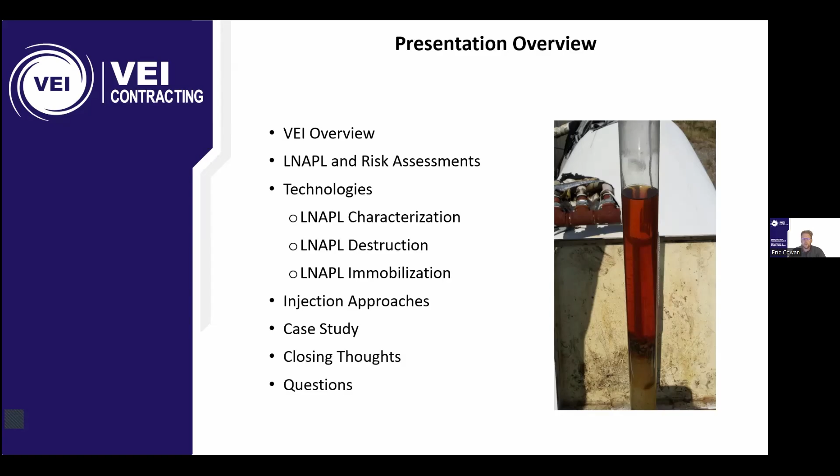I won't go through the Vertex thing, but for myself, I am a senior project manager with VEI. I've been here for over 10 years, and I work specifically in the remediation division with Kevin, primarily focused on injection techniques for in situ remediation. So let's jump into it.

So what are some of the details with LNAPL and risk assessments across provinces? I'll go into some - they're pretty similar, but there are some nuances between key provinces. With Alberta, they specify active remediation or removal to the extent practicable for mobile LNAPL, and for non-mobile, it's more about control - they want to see that it's stable or decreasing for source control. This is pretty common across all jurisdictions, but they likely want to see some sort of risk management with exposure control, so vapor or what have you.

With British Columbia, it's a little more detailed - they specify a monitoring program for one year to determine that it's stable or not mobile. They actually have a classification of high risk site for properties with LNAPL over 2 millimeters, so sheen or higher, basically. And that can have some issues with the classification of the property.

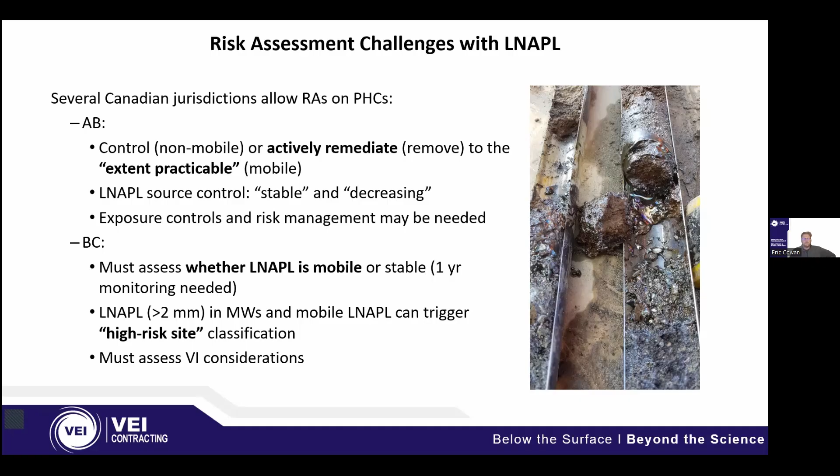So what do we have here in Ontario, where VEI is centralized? We have a similar process, but there is some permission for LNAPL in bedrock, though it's not preferred. In overburden, it's very rare that they would allow an RA with overburden LNAPL impacts, probably impossible. They have this term, remove LNAPL to the extent practicable, including films, sheen, and 50% solubility. I want to highlight that term, extent practicable, because it's in the title, but it doesn't mean cost. It's more about the technological availability to do this. It's not an excuse to say it's too costly.

Rather, you need an excuse of, well, it's just impossible technologically to do this. To the point of 50% solubility, this is something interesting in Ontario: you don't actually need to detect LNAPL, but if your groundwater concentrations are above 50% solubility, that could highlight the potential for product to be generated. That could be flagged under the RA assessment. And again, like the other jurisdictions, the vapor intrusion considerations must be addressed or assessed.

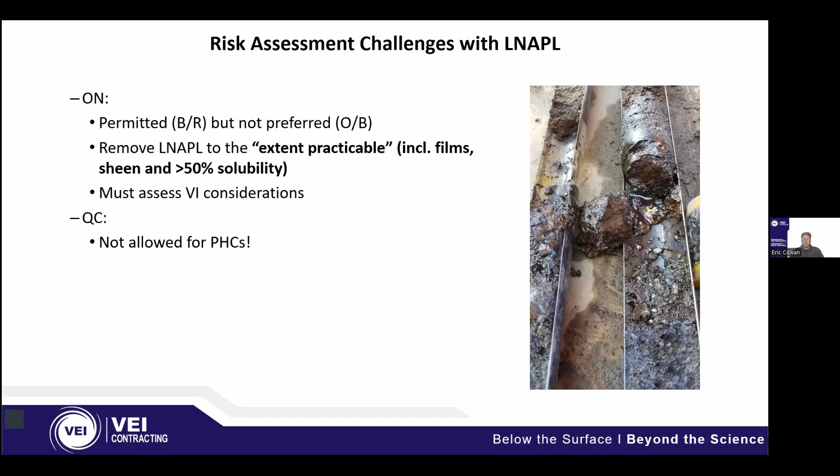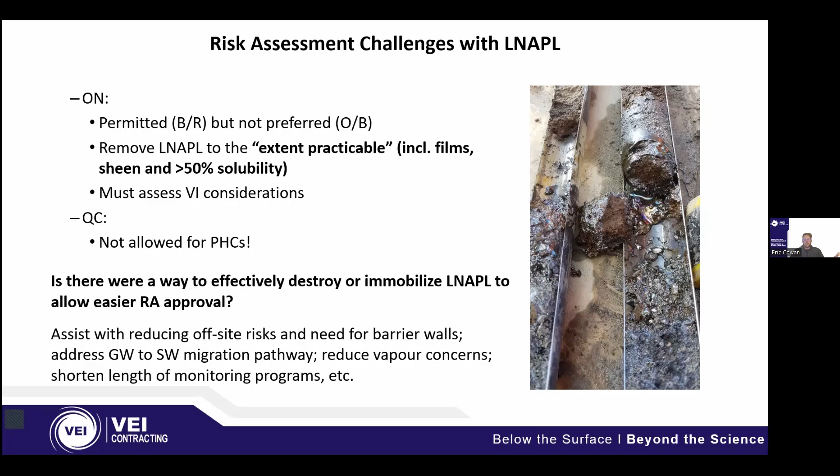But what about Quebec? RAs actually aren't allowed for PHCs in general, so it's kind of a no-go there from the get-go. So the whole point of this talk, the objectives, is to look into a way to effectively destroy or immobilize LNAPL for an easier RA approval. We want to assist with reducing offsite risk and the need for barrier walls, addressing groundwater to surface water migration pathways with these techniques. We're reducing the vapor concerns that may come with it, and we can shorten the length of monitoring programs when doing this.

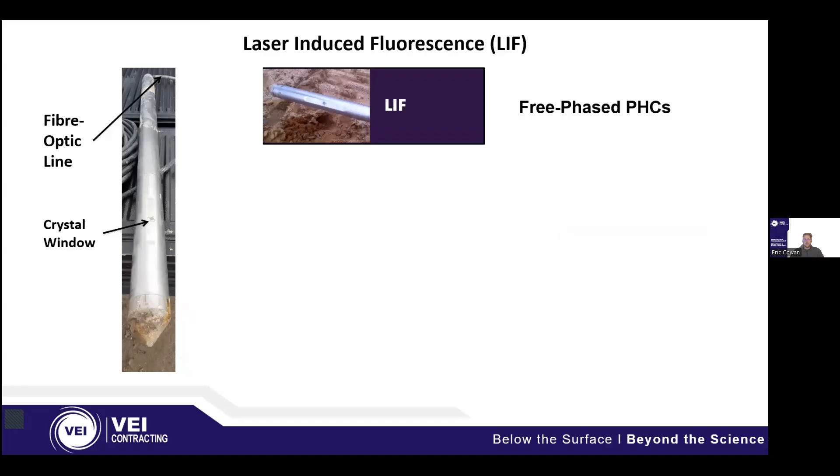So we can jump right into some of the technologies that can assist with this. Like I mentioned at the top, the conceptual site model, really understanding your LNAPL plume, is the first step. Something that can help with this is a technology called laser-induced fluorescence. This is a tool specifically used to detect free-phase PHCs in situ with a direct push tool that uses UV light to excite the polyaromatic hydrocarbons, PAHs, within the free-phase PHCs.

That creates a fluorescent effect. Within this probe, which you can see on the left here, we collect that fluorescence response, and we can detect in real time the free-phase PHCs, and fingerprint what type they are as we advance this direct push tooling. I'll get into more detail in a second of what that looks like in a report. The idea here is we can add on to an existing standard environmental investigation with boreholes and monitoring wells, an additional semi-quantitative response to say, hey, we're actually seeing these plumes in real time and where they are, and characterize it in a much faster way.

So you can do 10 to 12 points a day and get data in real time. We also add an EC electrical conductivity sensor on this as well, and we can classify the soil types as we do it. So what does this look like?

Here's an example of what crude oil and diesel just look like with the naked eye. You can see crude oil quite easily with just regular light. Diesel is invisible. So when you flash UV light on these jars in this example, you can see the crude oil has a fluorescent effect, but the diesel, you can actually show that it's quite hidden without this UV light. You can maybe see a little bit with your naked eye, but above that, there are globules of diesel that were hidden unless you expose it to the UV light. Those aromatic molecules, the PAHs, absorb that UV light and then fluoresce a response that we collect with the LIF.

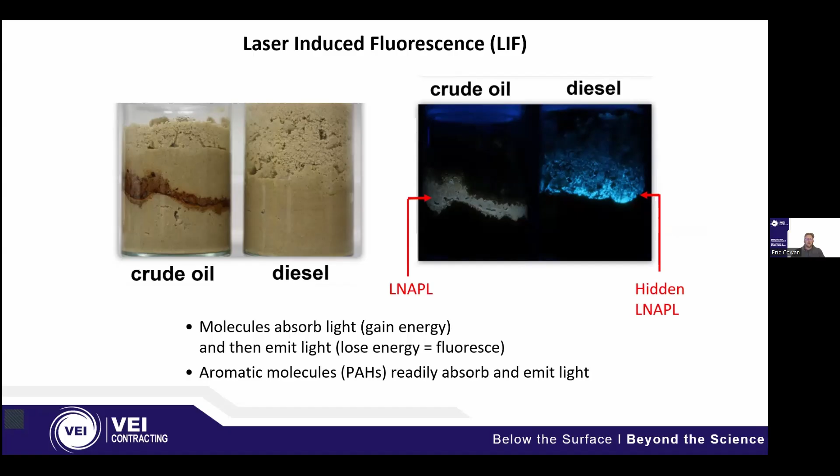So what does this look like in a log? This is what the field technician will be seeing on their laptop in the field as they're advancing the probe. We have two examples here of different fingerprints of fuels that were found in the ground.

On the left is an example of a diesel spill that was identified with LIF. You can see the green coloration in the response, which is along the x-axis, while depth is on the y-axis as you're advancing down.

Each of these callouts is called a fingerprint. We have different terms for lighter or heavier fuels: they're either blue shifted, meaning more of a lighter PHC like naphthalene, or red shifted, which is something heavier like diesel or heating fuel or crude oil.

This creates these fingerprint callouts, and we can identify and speciate the type of PHC in the ground. Diesel has a green coloration of the response, that's the average of these wavelength peaks, a bit more red shifted, whereas something like kerosene jet fuel is very much blue shifted, with lighter PHCs, smaller PHCs being dominant. So it's a great tool to identify the actual type of PHC, not just where they are.

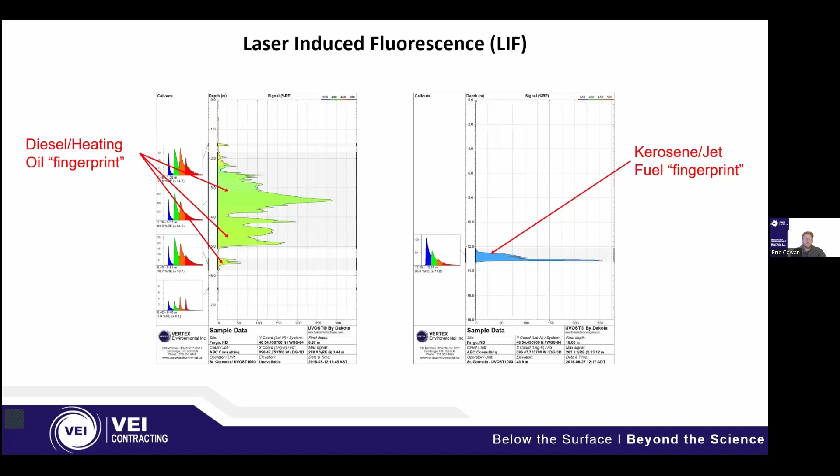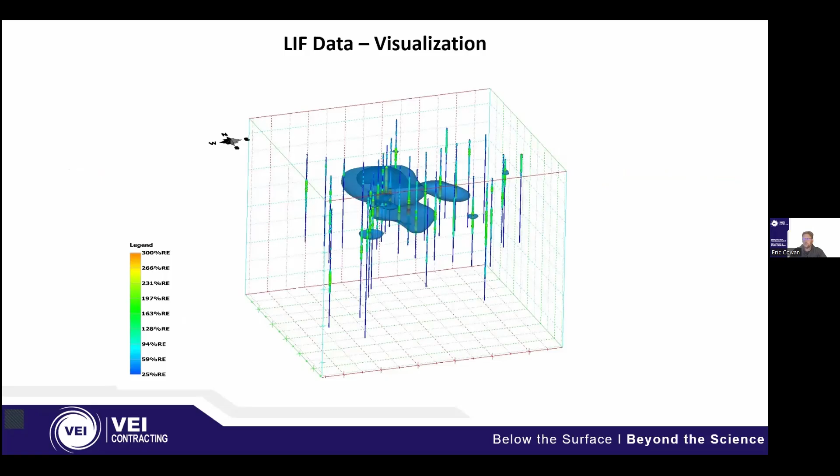But we can move on to destruction techniques. So what happens after we've done these characterization tools and have a good understanding of the plume structure, we want to now address it with treatment. The first technology I'll jump into is Trap and Treat BOS 200 Plus.

This is a combination of activated carbon, which is the trap portion of the amendment, with different terminal electron acceptors and nutrients and microbes as the treatment portion of the carbon trap and treat.

What this means is that activated carbon, like you'd find in a Brita filter or that used in water treatment systems, is very porous and can trap or absorb PHCs within the micro, macro, and mesopores, small to large pores within the structure of the carbon.

When we include terminal electron acceptors and different microbes, which exist naturally in the subsurface as well, but we add them along with BOS 200, you actually create biofilms and degradation sites within the pore structure of the carbon. This is very powerful because you can remove PHC mass from the subsurface and from the dissolved phase.

We'll talk about LNAPL as well, but you're actually destroying it within the carbon structure and freeing up more space for additional trapping once the eventual destruction of the PHCs happens within the pore space. It has a regenerative effect: you're trapping and treating, degrading, and then once that's gone, the end products are kicked out, opening up more pore space for additional treatment.

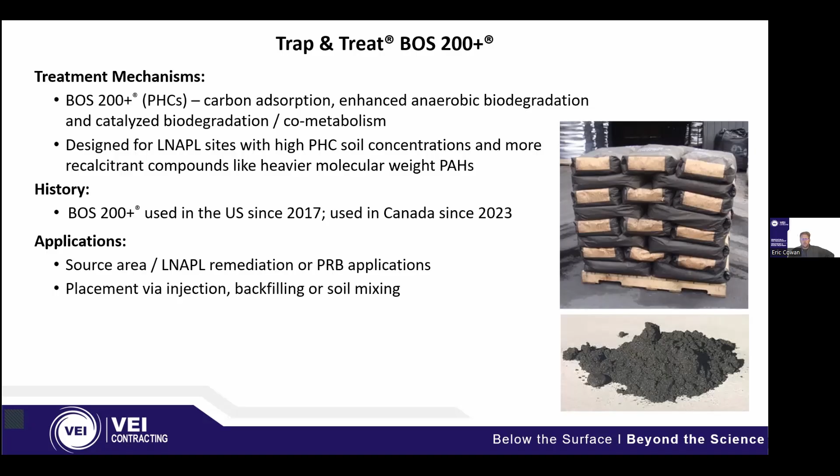The key thing here I want to highlight is it overcomes the contaminant mass limitations of PHCs in soil, so you can address some of these heavier soil mass sites or LNAPL sites. In doing so, because we're adding this carbon amendment that's very persistent, it actually prevents back diffusion and rebound, because that amendment exists within the pore structure and works for years and years. With that regeneration effect, you're able to keep that system going with trap and treat, and usually it's a single application, and again, it's a long-term solution.

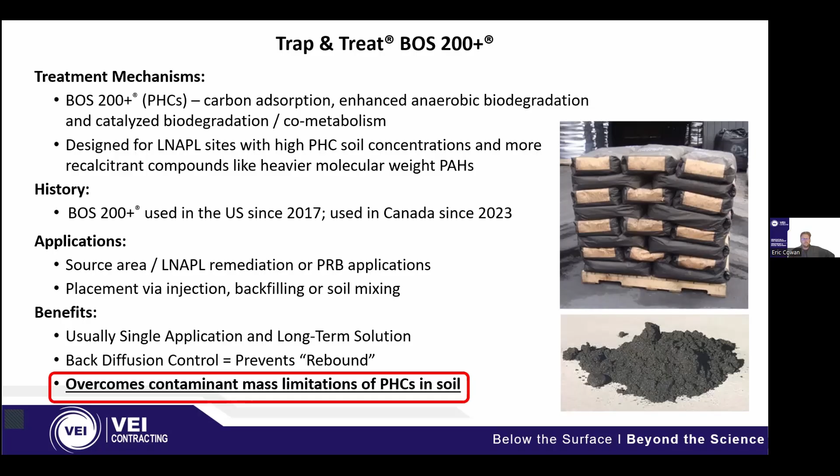So this is a very cool figure image from the suppliers of trap and treat. It's an image of biofilm generation - in the bubbles, you can see this microbial activity occurring on the actual carbon pore structure.

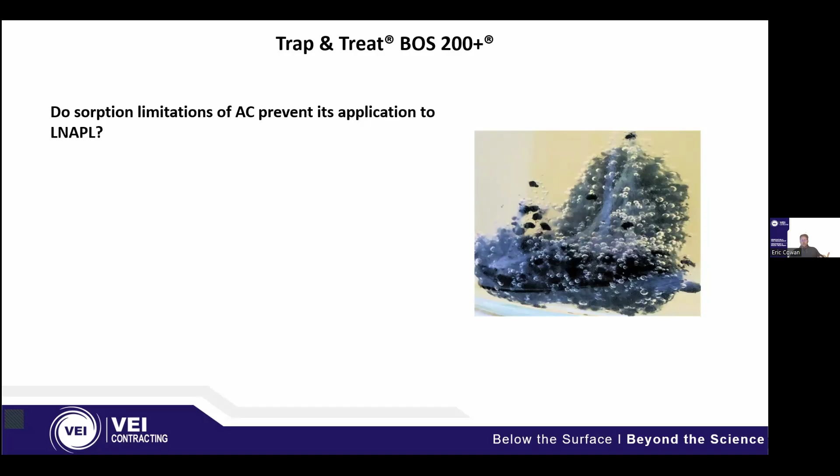So what are the actual absorption limitations of standard activated carbon, like you would have on a water treatment system? Studies have shown it's usually around 20 to 25% by weight. This means the saturation absorption capacity of PHCs is such that if you had 1 kilogram of PHCs, you'd need 5 times that amount of carbon to effectively absorb that mass. But with BOS 200 plus, before we even get into the destruction technology, the carbon they use within trap and treat has actually been measured much higher - it's at almost 60% by weight. So you get more than double the absorption capacity of PHCs compared to standard granular activated carbon.

One of the key things we like to specify here, and RPI likes to show in some other studies I won't get into, is that the actual adsorbed PHCs that enter the pore space of the carbon can get down to the micropore level - very small spaces - and they're still bioavailable there. There isn't an issue of it only treating in the large pore spaces and not everything; they can show it is bioavailable and can be treated even down to the micropore level. Basically, the bugs can fit in there and it does work.

When we get back to that regeneration topic, studies show it actually recovers a substantial amount of that absorption capacity. So your carbon traps PHCs, treats them, removes the end products, and then can recover over 90% of that original absorption capacity following that first round of treatment. That's very, very powerful.

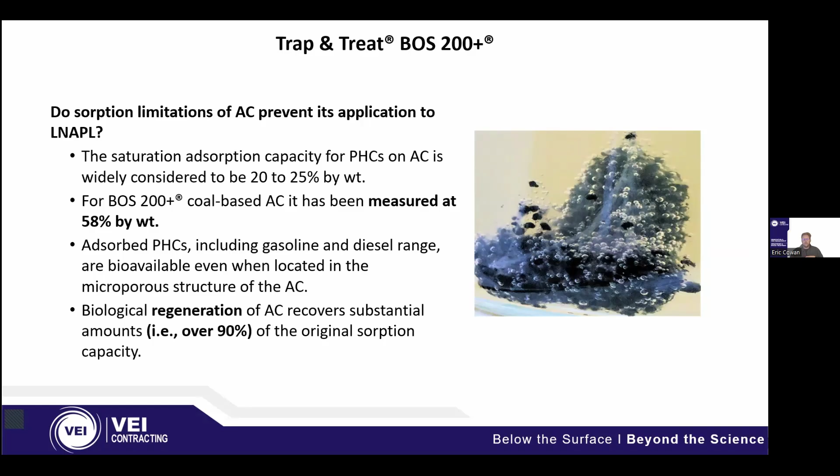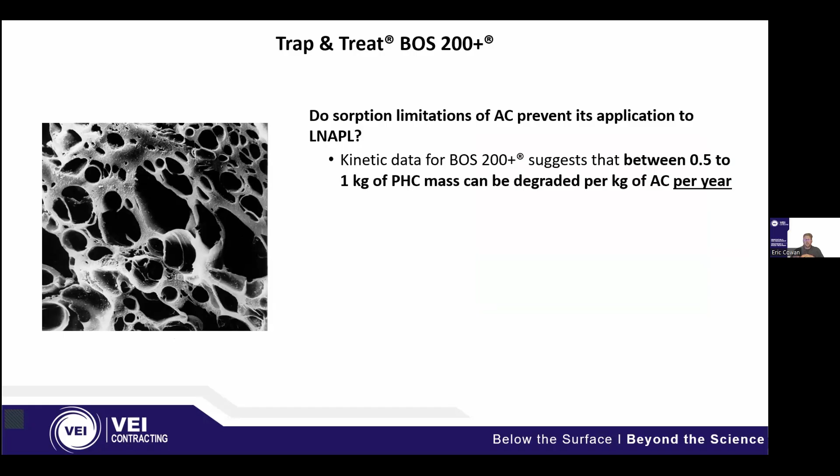So what about LNAPL? Is there a limitation with activated carbon when we have sites with high soil mass and LNAPL levels? This gets into some of the kinetic data we can discuss, where we can actually show that BOS 200 plus, with some of the things I just mentioned, can degrade up to 1 kilogram of PHC mass for every kilogram of AC per year. This is really powerful in the sense that we don't need that 5x of standard carbon - the 5 kilograms of carbon to 1 kilogram of PHCs in standard carbon - but you can have a much lesser mass of BOS 200 plus to address basically that 1-to-1 PHCs to activated carbon ratio.

And that regeneration effect, again, even when it's saturated with LNAPL, is a viable process - that regeneration can occur and you can free up more space. Overall, it's a coal-based activated carbon amendment, and it has the necessary properties, like I just mentioned, with that degradation mechanism to address, realistically, these LNAPL impacted sites.

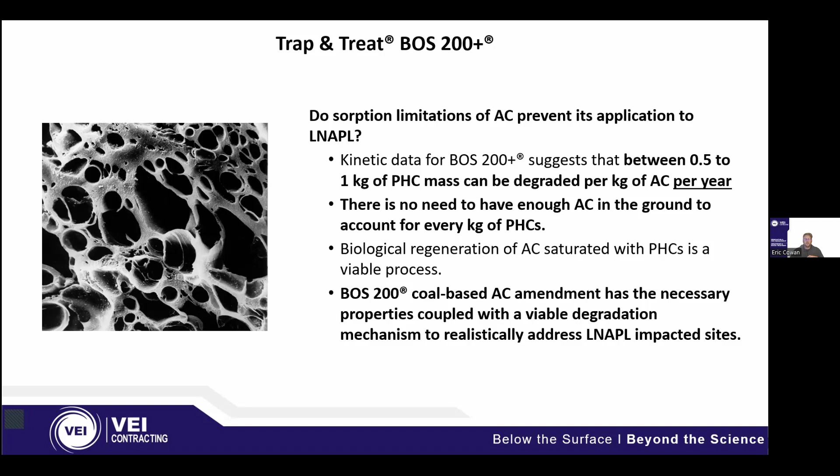Moving on to another technology - in the case study I'll go into at the end, it's about trap and treat, but I wanted to mention immobilization first. This is specific to sites where there is LNAPL that's mobile and causing an issue, potentially to nearby receptors. Perhaps the objective isn't necessarily to treat and destroy everything, but you really just want to immobilize the LNAPL so it's not a migration risk or mobile risk.

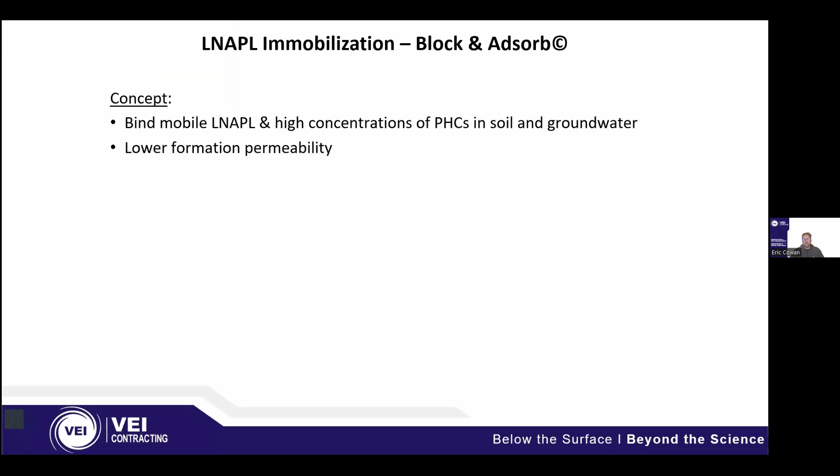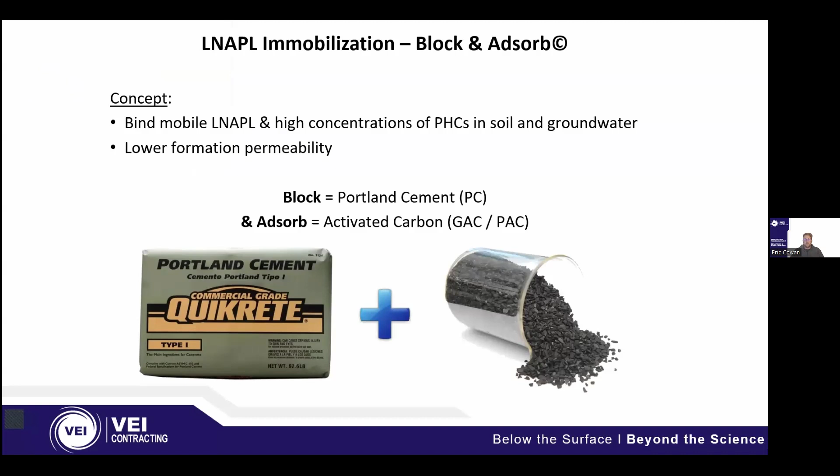The concept here for this technology is called block and adsorb. It's essentially to bind that mobile LNAPL and high concentrations of PHCs in soil and groundwater and lower the formation permeability in general to block that PHC mass and LNAPL from migrating. It's quite simple actually - it's just a mixture of Portland cement and activated carbon. These are readily available and inexpensive materials that can be quite powerful when combined.

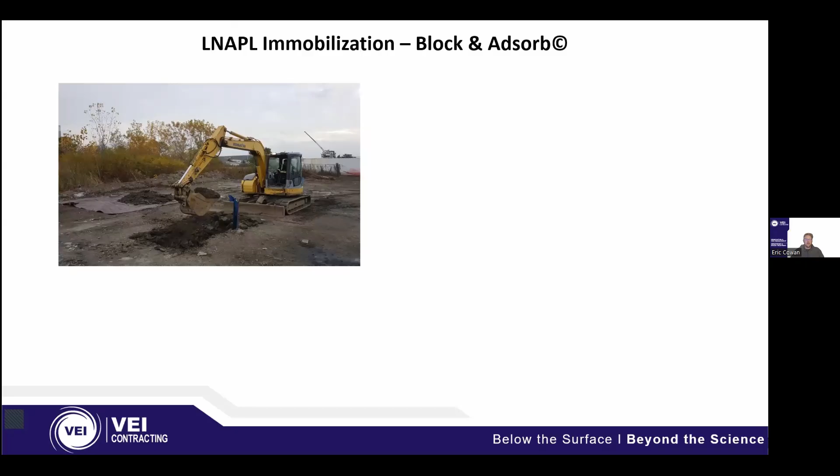We had a pilot recently where there were pretty high levels of LNAPL in shallow groundwater, and I can show you some pictures here - we're doing a test pit.

And you can see here this bucket's basically full of pure product, just hovering above the water table. So the goal of this pilot was to show immobilizing this product with block and adsorb.

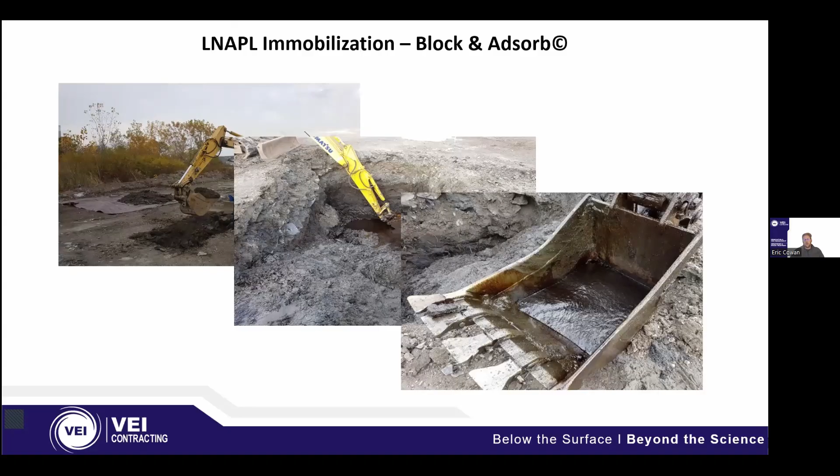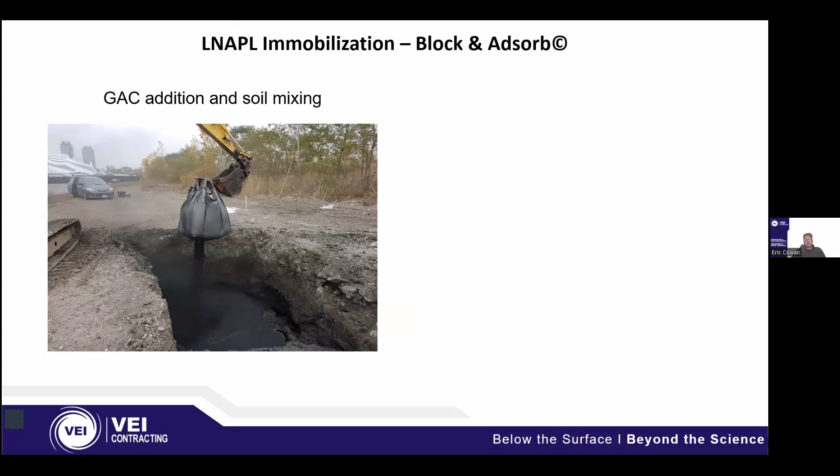So what we did is we opened up a pilot test pit. It was about a 10 by 10 area. We added granular activated carbon and mixed it up. We then subsequently added Portland cement and did another round of soil mixing, and let that cure for a few days. And here are the results.

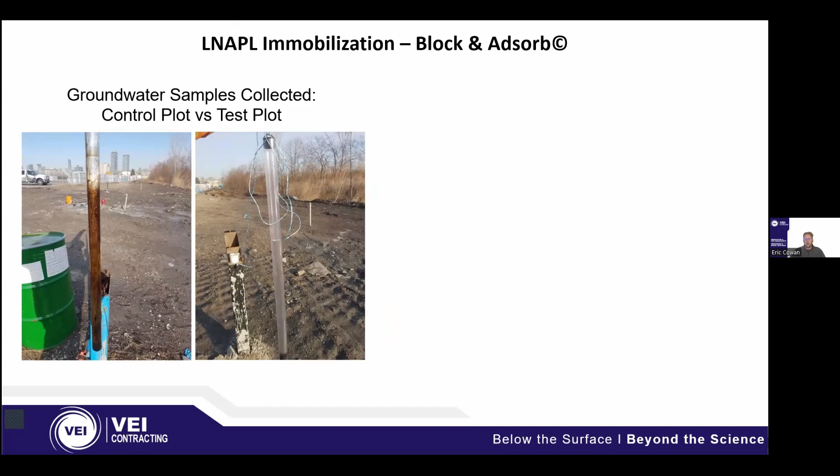So you can see on the left here is a bailer collecting a sample from the test well pre-soil mixing, and it's heavily stained. There's measurable thickness of product. And then here's the test well in the same location, post soil mixing, coming up with zero visible product, if not looking extremely clean. So what does that look like actually in the ground?

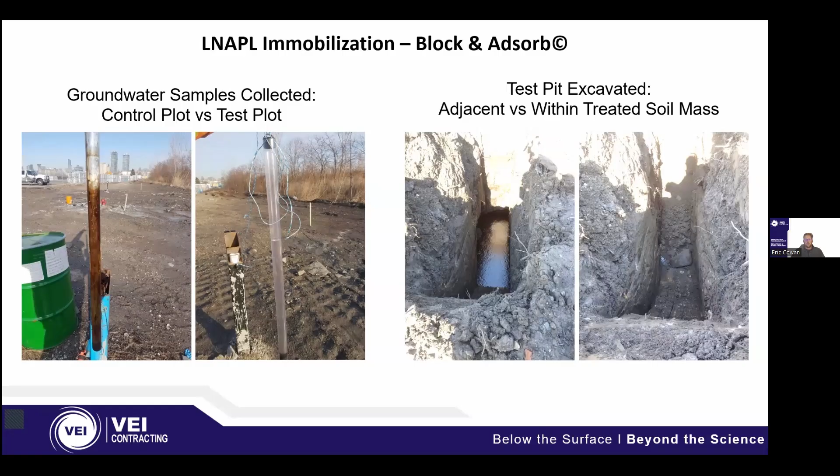So just to summarize, it's been proven effective at immobilizing LNAPL and sheens in soil in situ. And a key point: if we were to add these things individually, you would have some solid effects of blocking or adsorbing by themselves. But when you combine them together, there's actually a greater effect, and they work even better when combined.

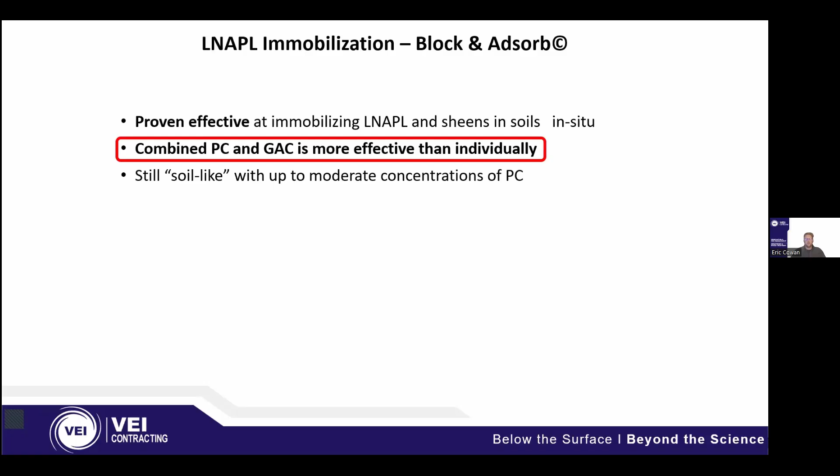And again, that soil is still soil-like. It's still malleable, you're still able to work with it. You're not creating a huge block into the ground. And we can inject this amendment for deeper soils or bedrock. We've done this at sites where maybe excavation is not feasible, and we can do this without having to excavate. Overall, it reduces the formation permeability quite substantially.

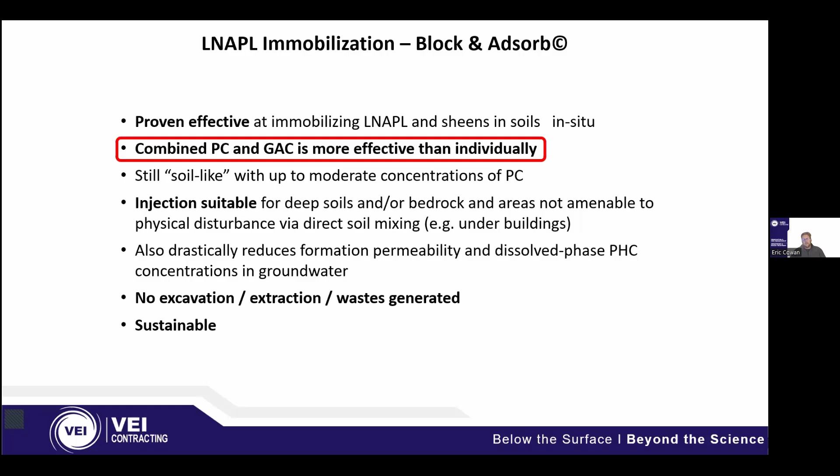And with this, dissolved phase PHC concentrations in groundwater are reduced as well. So overall, no excavation, extraction, and waste generated. You're not digging and dumping, you're doing everything in situ. And this is considered a sustainable approach compared to the alternative.

So let's get into injection. Before this case study, I'll talk about how we actually inject some of the amendments, specifically with trap and treat. Here's a profile view of what a typical injection system looks like. It has an injection trailer with mixing tanks, water tanks, and an injection pump. It's then connected to a direct push drill rig injection rod system.

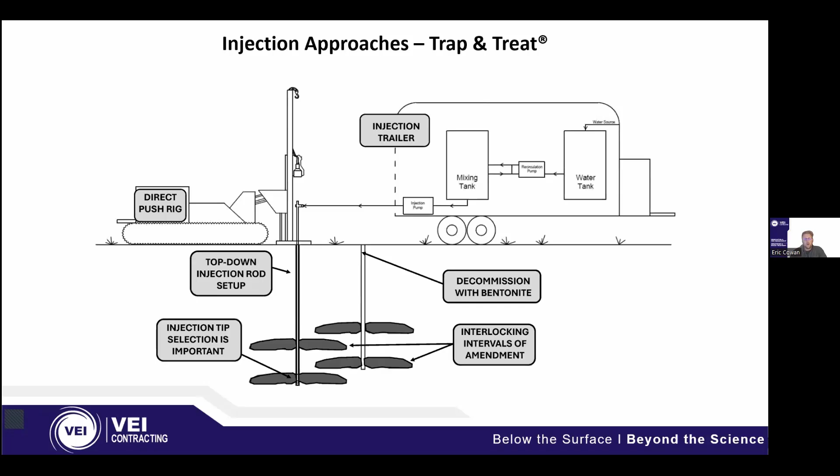And within that rod system, there's a pressure activated injection tip, which is very important. We can change that depending on the geology and what we're injecting. And we inject on a top-down system, meaning we're injecting shallow intervals first and working our way down.

So the goal when you're injecting remedial amendments like this is you want uniform distribution and you want contact between the amendments and the contaminants, right? You don't want any gaps. So what does this look like from a plan view?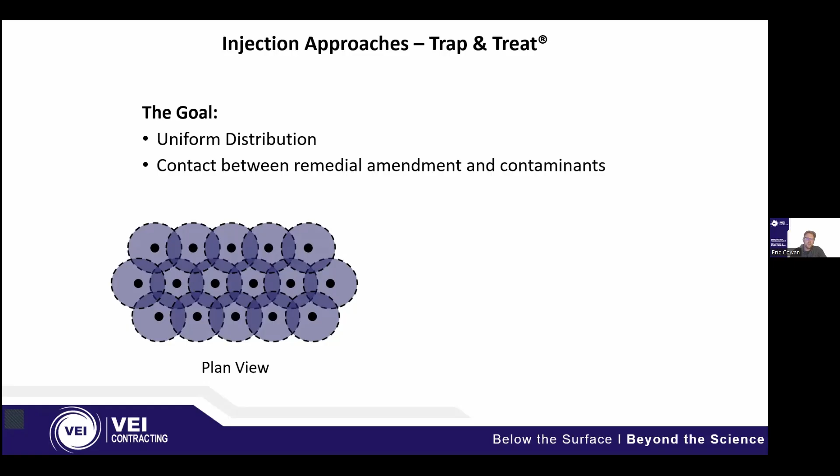We stagger our injection points based off the radius of influence we expect, which is just how far the amendment is going out laterally from the injection tip. We make sure we're covering a grid-like pattern with no gaps in between them. And in the same line on the profile view vertically, we stagger our injection intervals between points to make sure that vertically it's covered and no gaps in that sense.

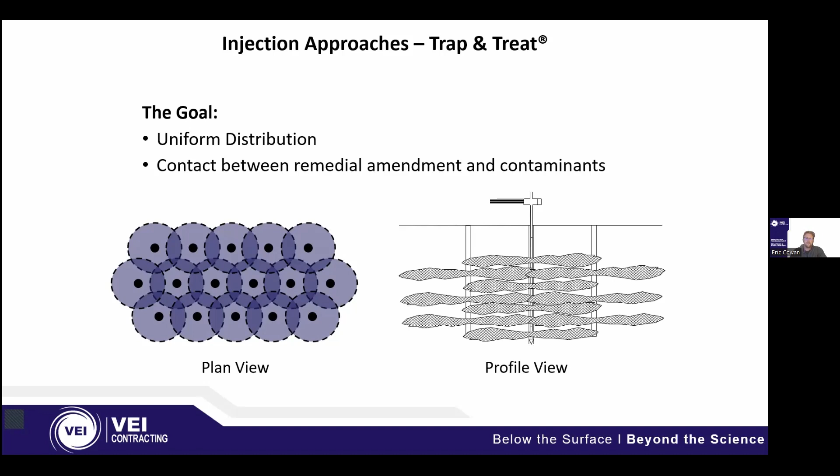Just a quick point here, something cool we've recently implemented at VEI is our new environmental site modeling software. We do this for every injection program now. We can actually map out our injection plans in 3D, as you can see, with those injection discs at each point in each interval.

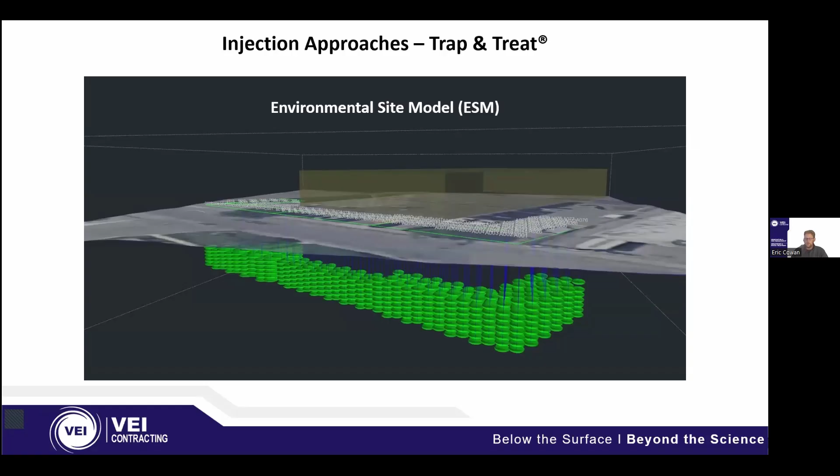And we can take all the site data we get from the property and upload it into the model with site plans, borehole logs. We can talk about high res data like LIF data we can incorporate within the injection design. And then we have real-time updates from field staff while they're injecting, so you'll see the injection being completed by the interval, by the foot as it progresses. So it's very powerful, and we're implementing this now across every injection.

And then we can get into bedrock. So years ago, it seemed very difficult, if not impossible, to address contamination in bedrock through in situ means, let alone LNAPL.

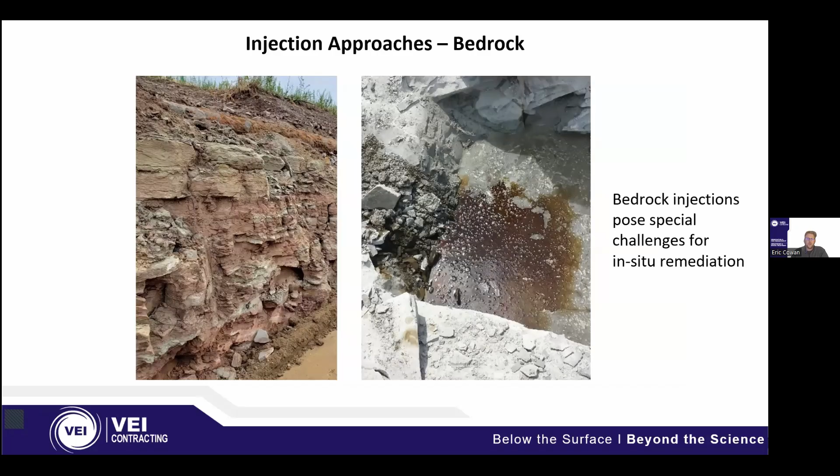But we've had great success in recent years with a new type of injection system using injection packers or straddle packers. It's kind of an offshoot taken from oil and gas technology. It's basically a rod with two bladders on the top and bottom that can inflate to very high pressures, up to 1,000 psi.

What you do is install an open borehole in the rock, so you basically have no well infrastructure, no screen or anything, just an open borehole. You install this injection packer to your target depths and then inject through the middle interval, and you can do this as far down as you need.

It's a high pressure, high flow system. It's not fracking—we're not hitting pressures that high—we're just injecting amendment into the existing bedrock fractures by displacing groundwater and material within them.

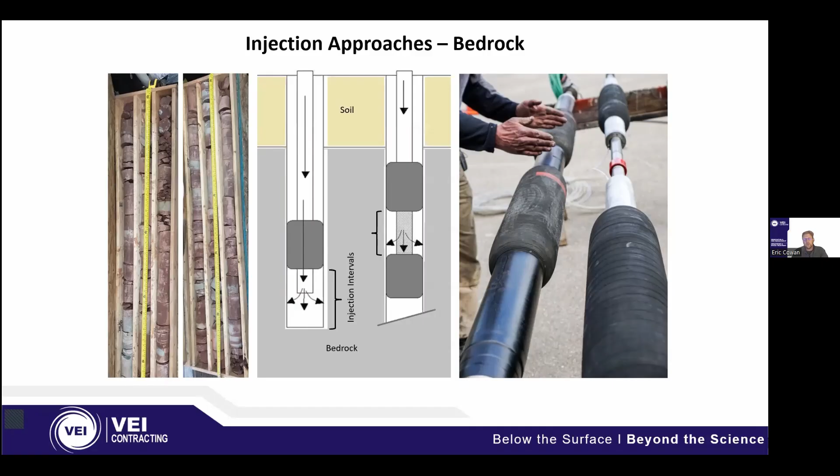The next approach addresses what happens if bedrock wells or boreholes are too fractured or aren't staying open, or even overburden geologies are too tight for direct push. We have another injection method called GeoTAP, which stands for Geological Targeted Access Point.

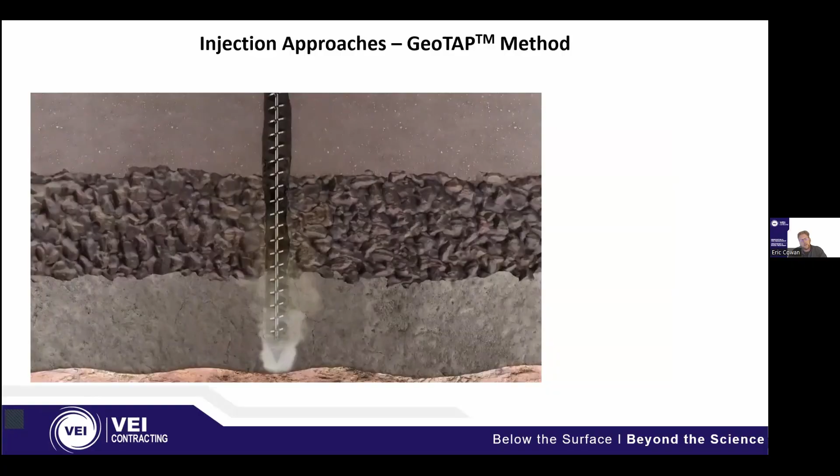You can do this in bedrock and overburden. Essentially, you create a pre-drilled borehole and backfill it with bentonite, then return with direct push to inject through the bentonite into the formation, whether overburden or bedrock.

This is very useful for sites where direct push is not possible, like flowing sands or tight tills, or bedrock that's too fractured for the packer system. We've done this now at over 30 sites with great success.

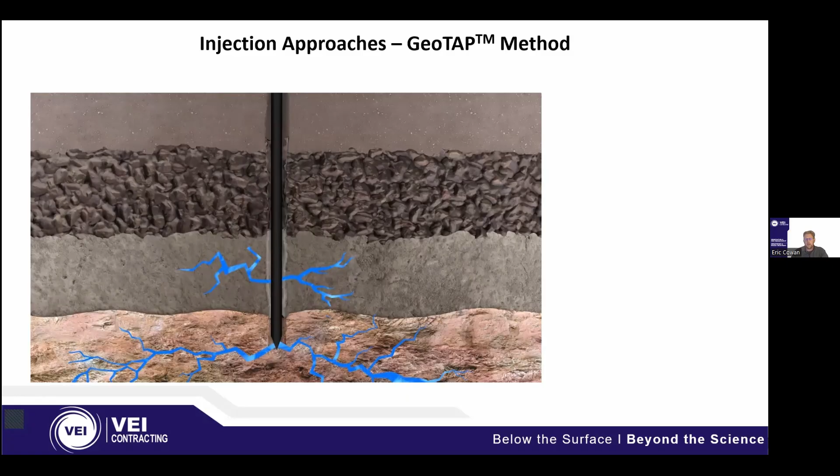A question I get a lot is: how do you know it's getting through the bentonite? You're trying to inject some sort of particulate amendment or otherwise through a hole plug, essentially.

We can prove this two ways. First, we just don't see bentonite blowing up the hole like toothpaste, so that's a good start—we're not displacing anything within the borehole.

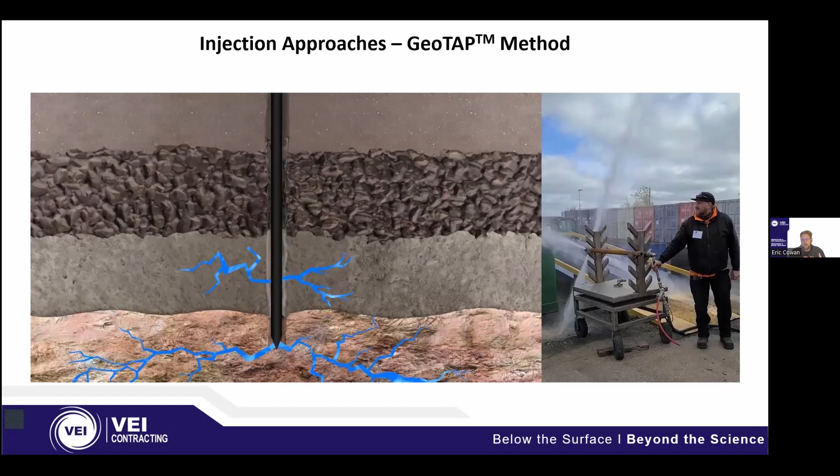But second, at most sites we conduct QA/QC boreholes near the injection points and collect soil samples to confirm visual detections of the amendment within the injection areas. We've seen that at all of our sites, which is great.

Okay, so now that I've highlighted those different technologies, I can talk about a case study with LNAPL issues and the process of RA and how it worked out.

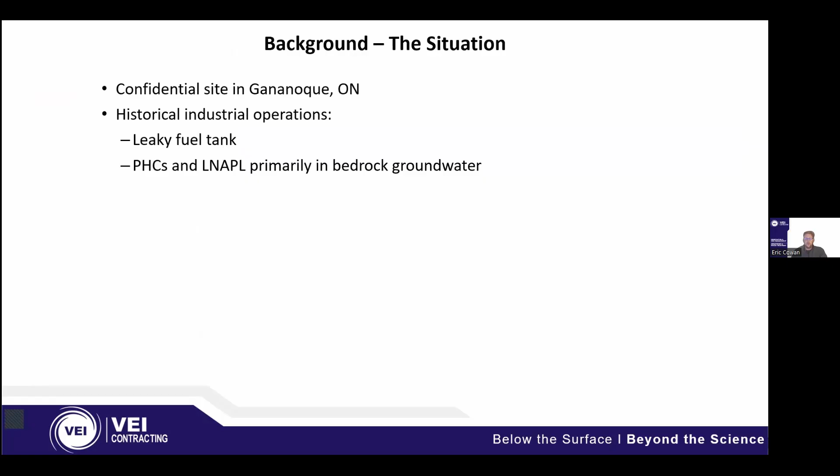A quick background: it's a confidential site in Gananoque with historical industrial operations and a leaky fuel tank. There was LNAPL and dissolved phase contamination primarily in bedrock, but also in overburden. There was future redevelopment planned, and an RA and RSC process underway—remediation was required to address the free product to get this RA process going.

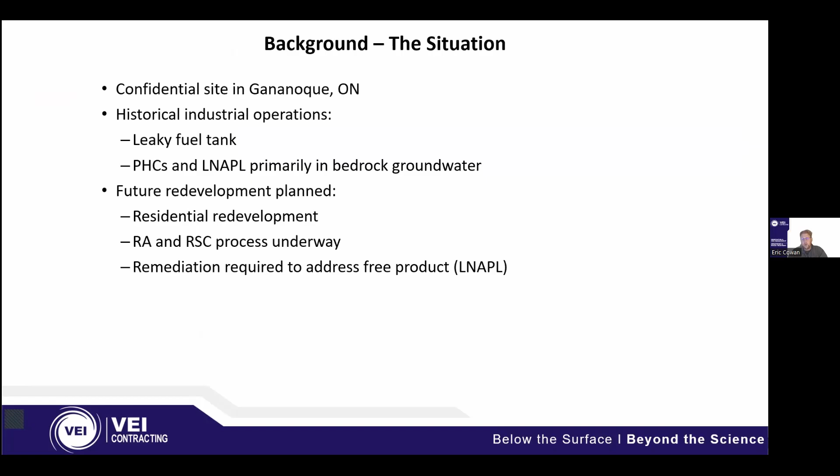So what was the plan? It was a staged approach: source removal, decommissioning of the fuel tank and removal of impacted soil—just yanking the tank and cleaning up the soil nearby. There was an MPE system proposed for direct extraction of LNAPL, and then the final step was an in situ injection program to address remaining LNAPL and dissolved phase PHCs.

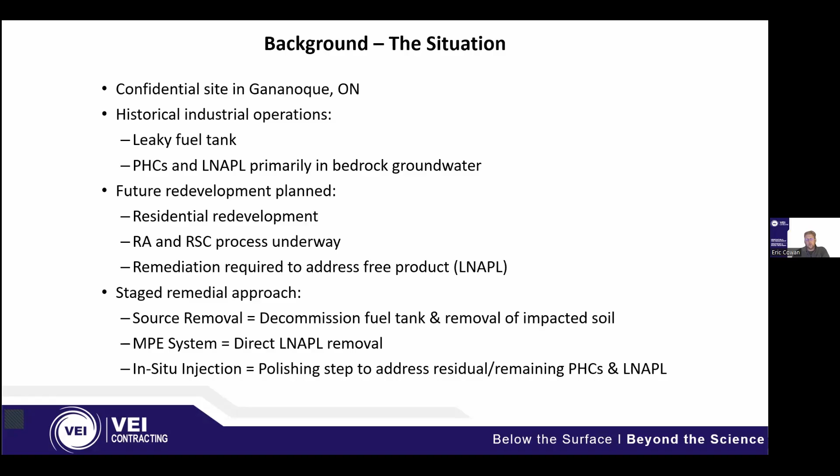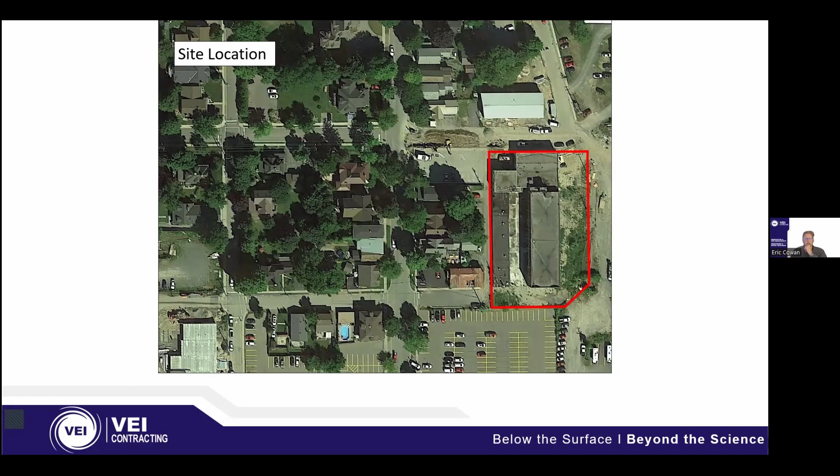So here's the site—it's residential, clearly, but with former industrial operations nearby. Here's the remedial area, and here's a site plan with the monitoring well network. I'll go into some details on where this plume was. Groundwater flows to the east, and the tank was located in the building here.

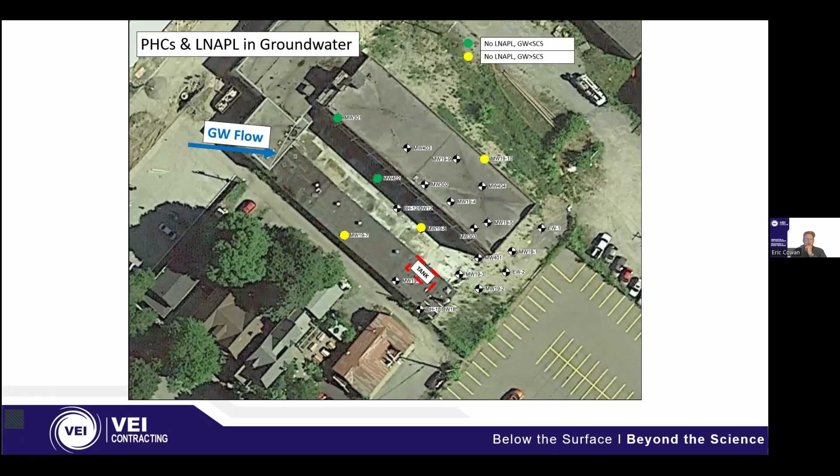The green dots are no LNAPL, groundwater was clean. Yellow was no NAPL, but the groundwater was above standard. Orange was there was no product, but there was odors and groundwater above standard. And then, of course, our red is where there was product found.

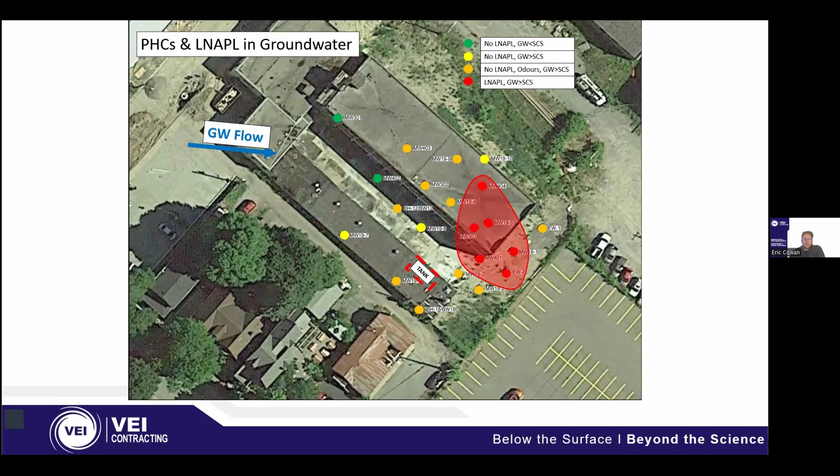So this is kind of just a general idea of this plume of the LNAPL at the site. Our first step was the multi-phase extraction system to remove the bulk of that LNAPL. What that means is MPE, multi-phase extraction, is a system that splits the extracted groundwater, LNAPL, and vapor into those three phases and treats them individually.

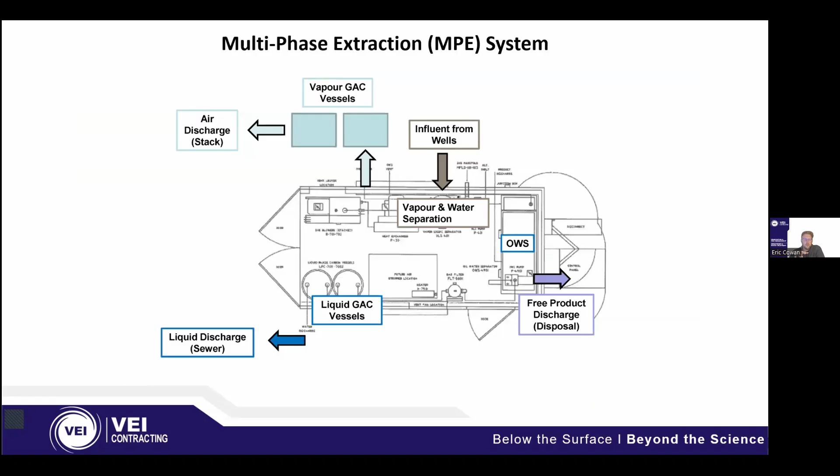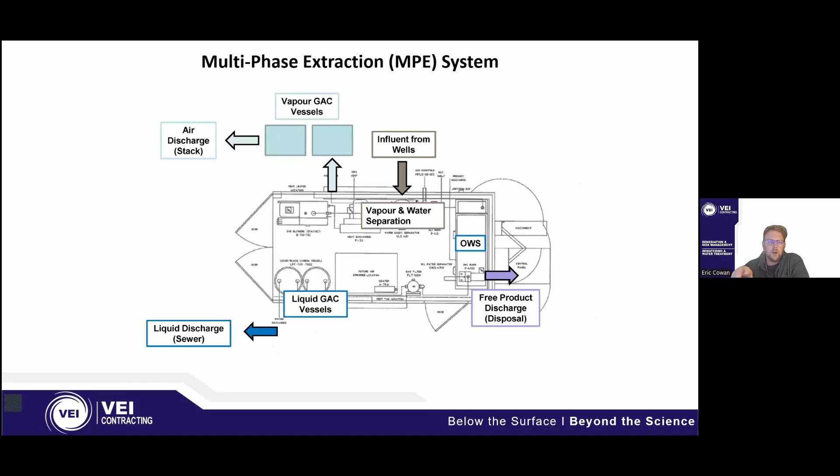I won't go into too much detail here, but basically what you have is extraction wells set up. You're pulling all the contaminant out with the three phases, and they're split up into either liquid carbon vessels for discharge to a sewer. You're splitting that product for storage and eventually disposal from the oil water separator. And then your vapor is split from the water for treatment through vapor GAC, carbon for discharge.

So what does this look like on a site plan? The purple extraction line overview is shown here, extracted some of the key wells, and we added some extraction wells as well. We did some overland extraction lines. We didn't have to trench everything in. It wasn't an active site, so that saved costs, and it was quicker. And we had pretty good containment of the LNAPL because we were hooked up to most wells that we found it in.

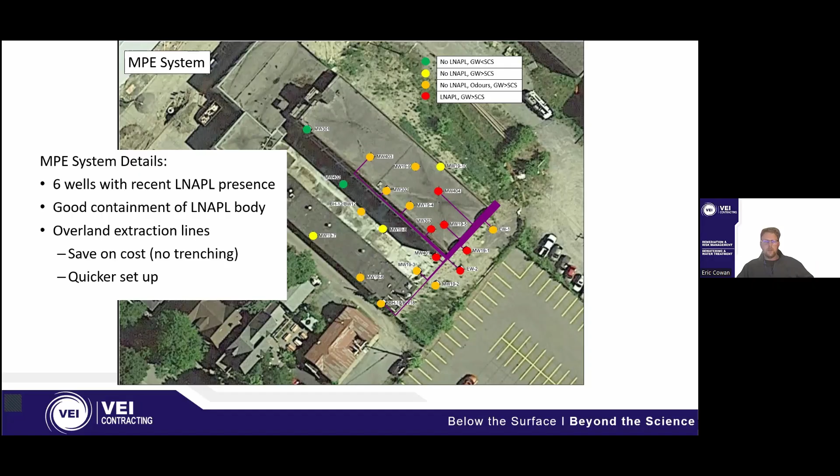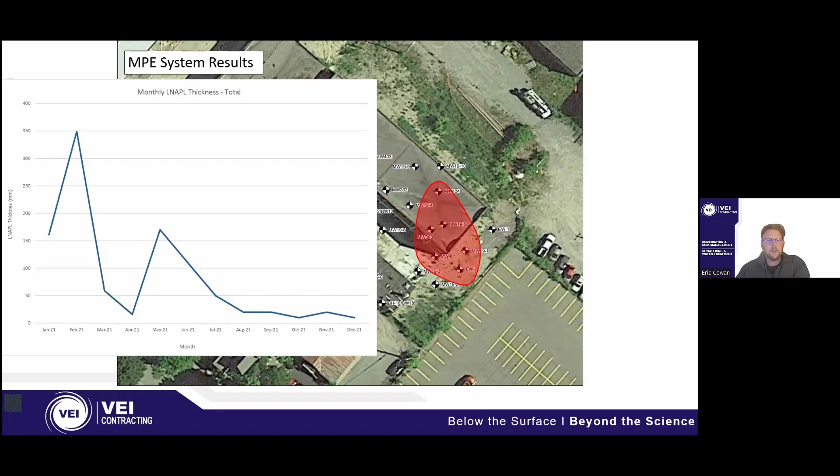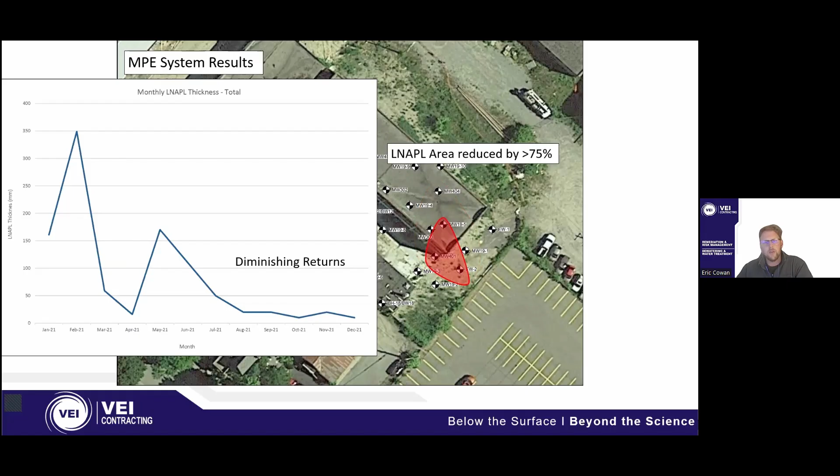But as you can see, there's diminishing returns, right? You're not getting that final no LNAPL clean result. But we saw that LNAPL area reduced by over 75%. So it was a great success. But we needed something else to polish this off.

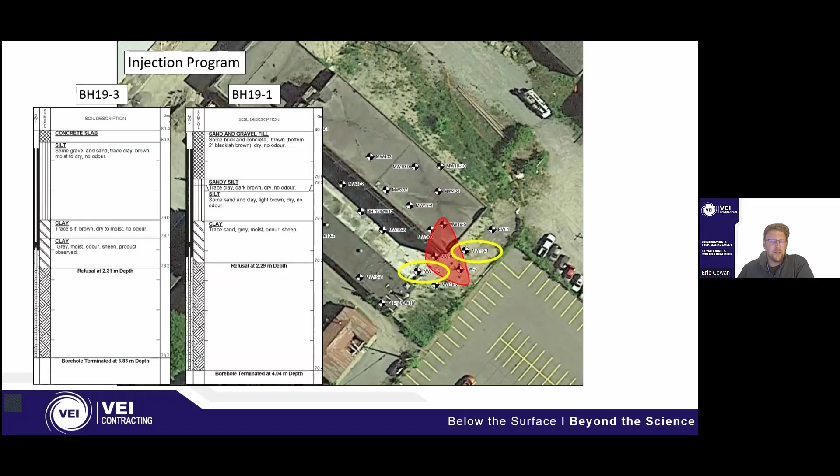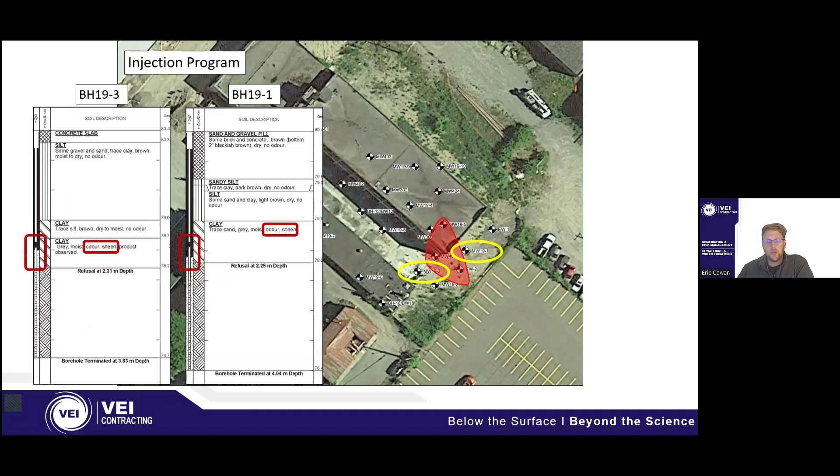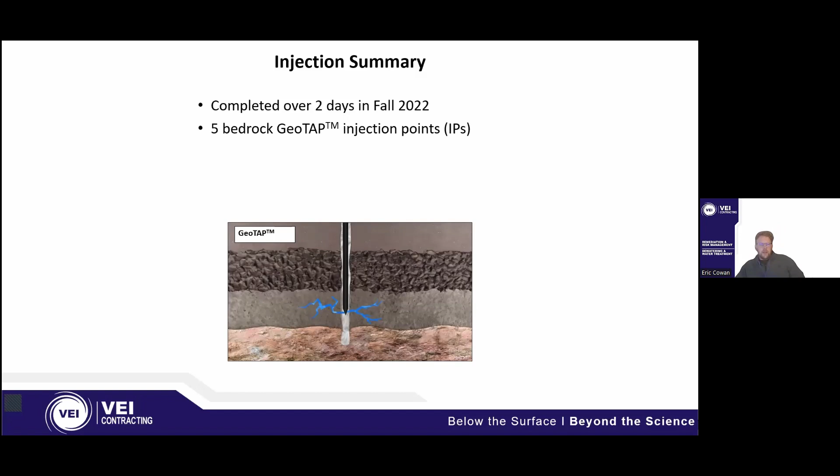Here's some borehole logs just showing the different geologies. We saw pretty shallow bedrock at 2.5 meters or under. The clay had some impacts as well. You can see some notes on odor here, but the majority was in the rock, and we had to address both geologies. So what did we do for the injection to finish this off: we did a 2-day injection in 2022. We did 5 bedrock GeoTAP points, like I described earlier, and then 10 standard overburden direct push points. These 15 points were injected to target that remaining hotspot area that I just mentioned.

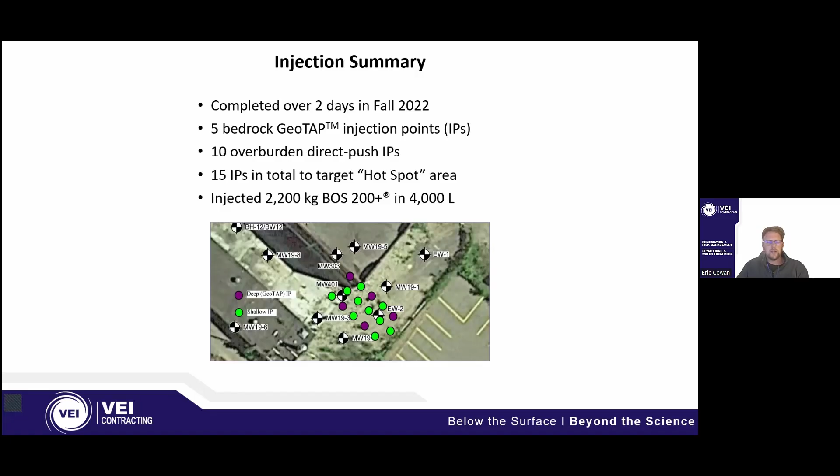Here's the site plan showing the locations. Overall, we injected over 2,200 kilograms of BOS 200+ in 4,000 liters. So it's a pretty heavy mass of amendment in a small volume, to address that heavy mass of LNAPL that we're trying to clean up.

So what were the results? We saw in our wells LNAPL thickness decrease substantially, basically to no visible measurable thickness. After only a few months, I think 8 months, we saw success. This was sustained enough for the RA process to continue, as there was no measurable LNAPL following our remedial program.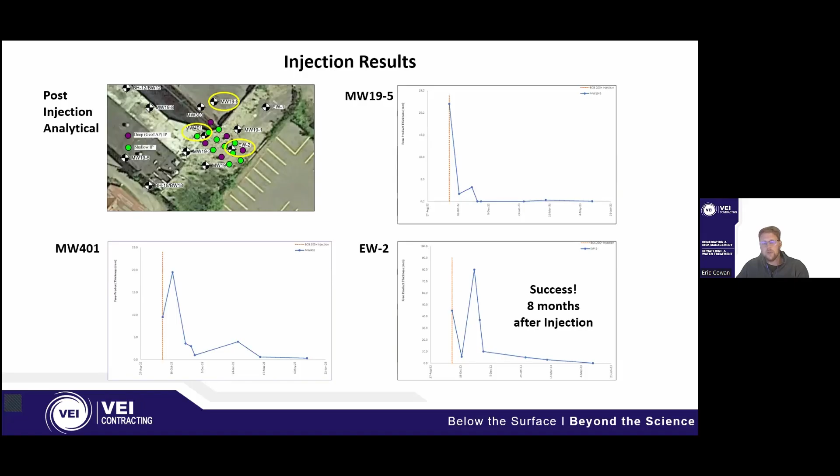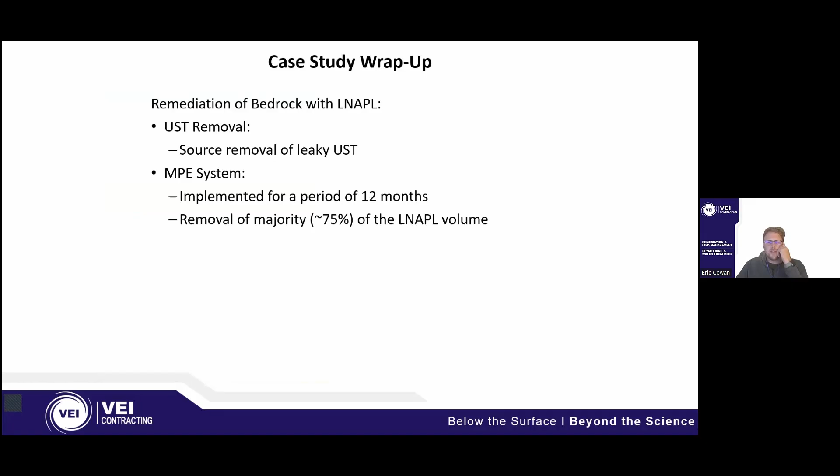So in summary, we had to do 3 steps here. We had to do a UST removal to get the bulk of that contaminated soil and LNAPL from the source. We then implemented an MPE system for a year to remove the remaining bulk of that LNAPL, 75%. We then did our injection approach to address the remaining 25%, which was completed with an injection of BOS 200+, even with some pretty high measurements of LNAPL. That PHC mass didn't saturate the BOS, and it was able to be overcome.

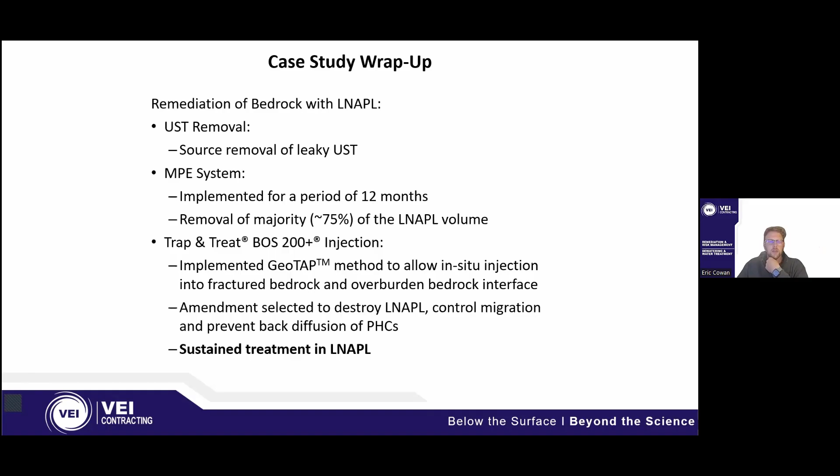And that was a sustained treatment approach of LNAPL, right? It's destroying the PHCs within the carbon and regenerating to last for quite a long time and be persistent across 2 geologies, which was quite difficult.

So in summary, successful risk management measures for LNAPL sites start with a comprehensive CSM.

This gets into some of the tools we can use to help with developing a CSM, like laser-induced fluorescence, LIF. A note here: if you're going to use RPI's Trap and Treat products, they actually provide free lab analysis of whatever contaminant you have on your site, PHCs here, for remedial design. So it's something we use on a lot of our sites for better understanding and characterizing contamination.

And then on to LNAPL destruction. We talked about Trap and Treat, BOS 200, overcoming mass limitations of AC sorption. And that degradation kinetics can treat up to a kilogram of PHCs per kilogram of BOS or carbon per year, which is quite powerful.

And then we spoke about LNAPL immobilization. This is Block and Adsorb. Portland cement and carbon combined are more effective than if we add them individually, and it's proven effective at immobilizing LNAPL and sheens in situ.

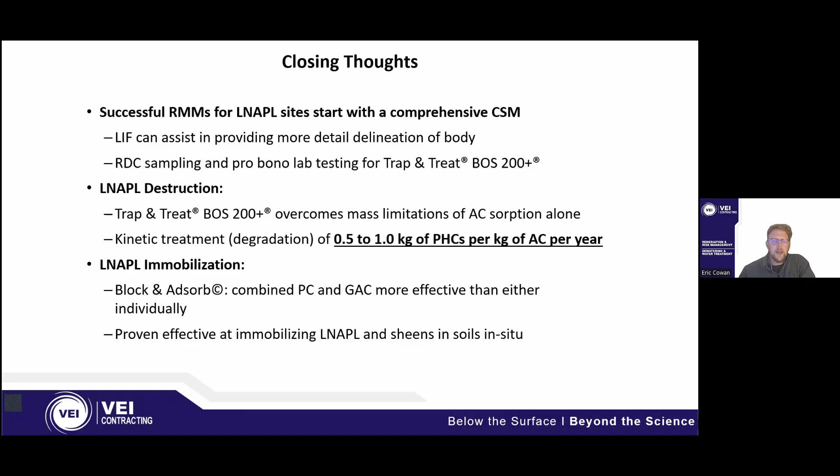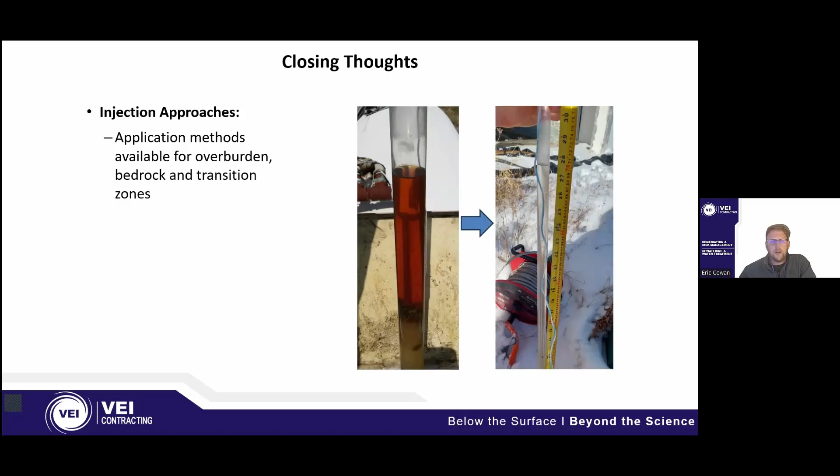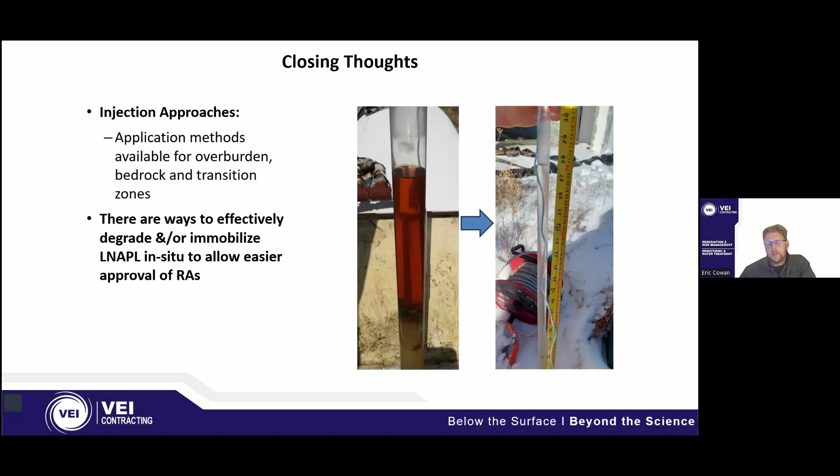And then we talked about some of the injection approaches and how we can overcome some of the limitations potentially with direct push, with GeoTAP, and getting into bedrock. Overall, there are many ways of effectively degrading or immobilizing LNAPL in situ to help the overall goal of allowing easier approvals of RAs. And that's it.

I hope I interested some of you and didn't fly through it too quick, but you can open up to questions now. All right, cool.

Thank you, Eric. We do have a few questions in here. I'll lob them your way and see how they go. The first one relates to Block and Adsorb. Why doesn't the Portland cement turn to a block in the ground? Does the addition of the AC prevent solidification?

That's a great question. What I would say is that we manage the concentration of Portland cement to make sure it's not hitting a level that's becoming excessive. I don't know if the carbon itself is creating an effect that limits that from happening. It's more that you can reduce your mass of cement because you're adding carbon, which can then immobilize more PHCs through adsorption, so you don't need as much cement to immobilize through stabilization. It's kind of a trade-off of how much can do what. But that's a good question on whether there's actually an effect within the carbon itself.

Yeah, I think you're right, I don't think there is. Going back to the testing, we did extensive bench scale treatability testing on that technology prior to the pilot scale test. Depending on the soil type, we found that if you limit the concentration of Portland cement to like 3 to 5%, the soil is still workable, it doesn't turn into a mass of concrete essentially. If you start getting above that, you do risk that happening. But at that point you're probably not cost effective if you're adding that much amendment into the ground, that's a significant amount.